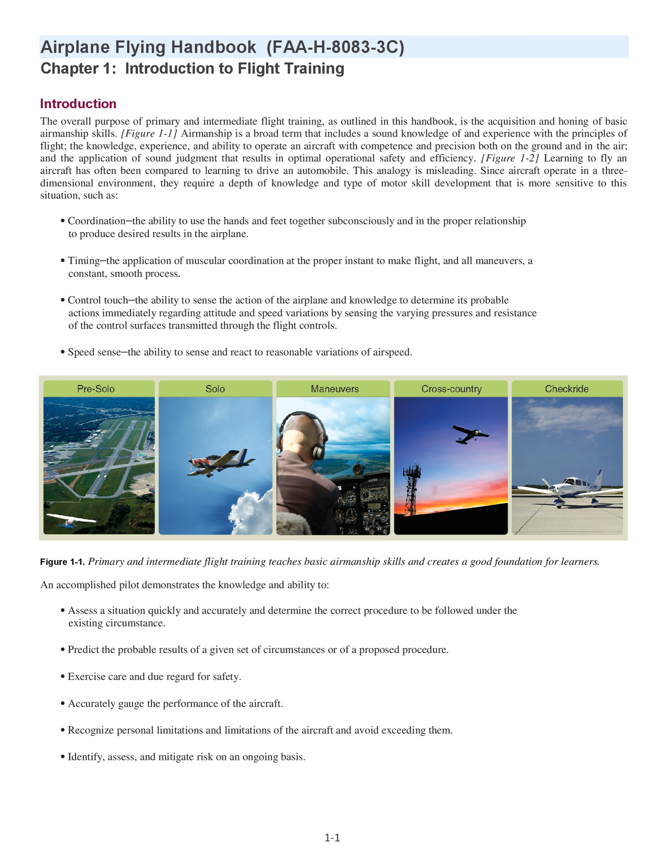An accomplished pilot demonstrates the knowledge and ability to assess a situation quickly and accurately and determine the correct procedure to be followed under the existing circumstance, predict the probable results of a given set of circumstances or of a proposed procedure, exercise care and due regard for safety, accurately gauge the performance of the aircraft, recognize personal limitations and limitations of the aircraft and avoid exceeding them, and identify, assess, and mitigate risk on an ongoing basis.

The development of airmanship skills depends upon effort and dedication on the part of both the learner and the flight instructor, beginning with the very first training flight where proper habit formation begins with the learner being introduced to good operating practices. Every airplane has its own particular flight characteristics.

The purpose of primary and intermediate flight training, however, is not to learn how to fly a particular make and model airplane. The purpose of flight training is to develop the knowledge, experience, skills, and safe habits that establish a foundation and are transferable to any airplane.

The pilot who has acquired necessary skills during training, and develops these skills by flying training-type airplanes with precision and safe flying habits, is able to easily transition to more complex and higher-performance airplanes. Also note that the goal of flight training is a safe and competent pilot. Passing required practical tests for pilot certification is only incidental to this goal.

Role of the FAA. The Federal Aviation Administration (FAA) is empowered by the U.S. Congress to promote aviation safety by prescribing safety standards for civil aviation. Standards are established for the certification of airmen and aircraft, as well as outlining operating rules. This is accomplished through the Code of Federal Regulations (CFR), formerly referred to as Federal Aviation Regulations (FAR).

Title 14 of the CFR, 14 CFR, is titled Aeronautics and Space, with Chapter 1 dedicated to the FAA. Subchapters are broken down by category with numbered parts detailing specific information. For ease of reference, since the parts are numerical, the abbreviated pattern '14 CFR Part __' is used, for example, 14 CFR Part 91.

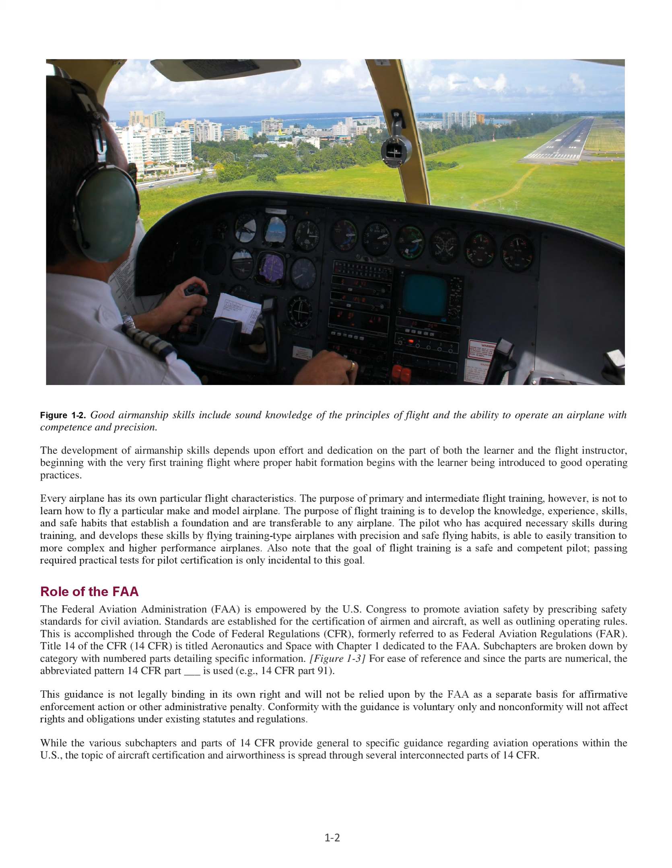While the various subchapters and parts of 14 CFR provide general to specific guidance regarding aviation operations within the U.S., the topic of aircraft certification and airworthiness is spread through several interconnected parts of 14 CFR. 14 CFR Part 21 prescribes procedural requirements for issuing airworthiness certificates and airworthiness approvals for aircraft and aircraft parts.

A standard airworthiness certificate, FAA Form 8100-2, is required to be displayed in the aircraft in accordance with 14 CFR Part 91, Section 91.203(b). It is issued for aircraft type certificated in the normal, utility, acrobatic, commuter, or transport category, and for manned free balloons.

A standard airworthiness certificate remains valid as long as the aircraft meets its approved type design, is in a condition for safe operation and maintenance, and preventative maintenance and alterations are performed in accordance with 14 CFR Parts 21, 43, and 91. 14 CFR Part 39 is the authority for the FAA to issue airworthiness directives, ADs, when an unsafe condition exists in a product, aircraft, or part and the condition is likely to exist or develop in other products of the same type design.

14 CFR Part 43 prescribes rules governing the maintenance, preventive maintenance, rebuilding, and alteration of any aircraft having a U.S. airworthiness certificate. It also applies to the airframe, aircraft engines, propellers, appliances, and component parts of such aircraft.

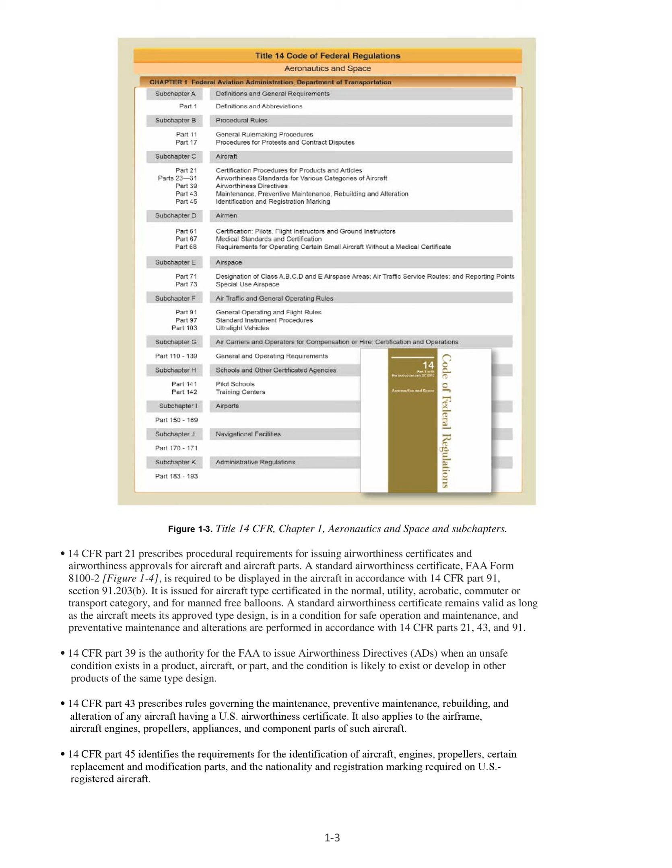14 CFR Part 45 identifies the requirements for the identification of aircraft, engines, propellers, certain replacement and modification parts, and the nationality and registration marking required on U.S. registered aircraft.

14 CFR Part 91 outlines aircraft certifications and equipment requirements for the operation of aircraft in U.S. airspace. It also prescribes rules governing maintenance, preventive maintenance, and alterations. Also found in 14 CFR Part 91 is the requirement to maintain records of maintenance, preventive maintenance, and alterations, as well as records of the 100-hour, annual, progressive, and other required or approved inspections.

While 14 CFR Part 91, Section 91.205 outlines the minimum equipment required for flight, the Airplane Flight Manual/Pilot's Operating Handbook, AFM/POH, lists the equipment required for the airplane to be airworthy. The equipment list found in the AFM/POH is developed during the airplane certification process. This list identifies those items that are required for airworthiness, optional equipment installed in addition to the required equipment, and any supplemental items or appliances.

Figure 1.5 shows an example of some of the required equipment, standard or supplemental, not required but commonly found in the aircraft, and optional equipment for an aircraft.

The equipment list, originally issued by the manufacturer, is maintained by the Type Certificate Data Sheet, TCDS. An aircraft and its installed components and parts must conform to the original type certificate or approved altered conditions to meet the definition of airworthy in accordance with 14 CFR Part 3.5.

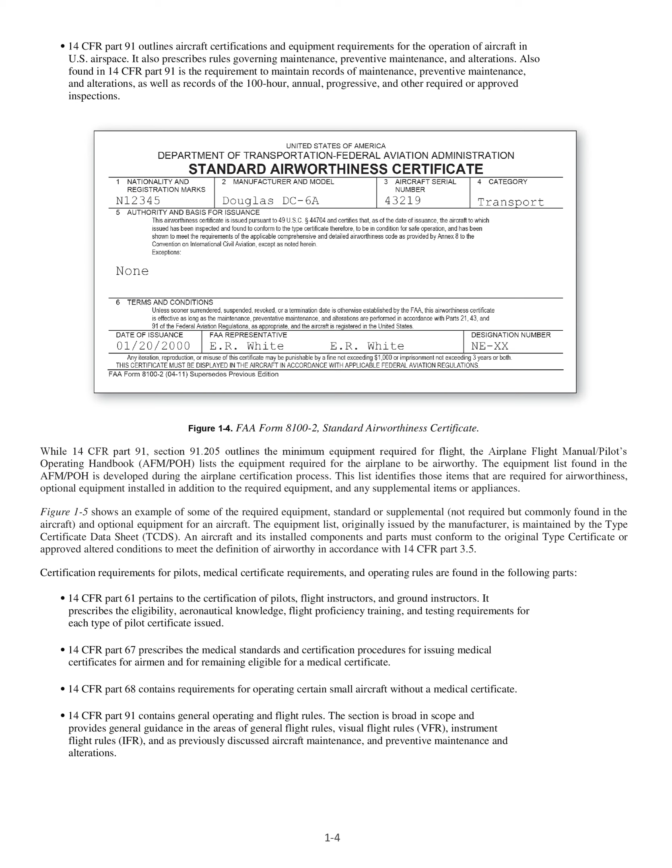14 CFR Part 91 contains general operating and flight rules. The section is broad in scope and provides general guidance in the areas of general flight rules, visual flight rules, VFR, instrument flight rules, IFR, and as previously discussed aircraft maintenance, and preventive maintenance and alterations.

Flight Standard Service. The FAA's Flight Standards Service, FS, sets aviation standards for airmen and aircraft operations in the United States and for American airmen and aircraft around the world. Flight Standards is organized into 4 functional offices: Office of Safety Standards, Air Carrier Safety Assurance, General Aviation Safety Assurance, and Foundational Business.

The primary interface between FS and the general aviation community/general public is the Local Flight Standards District Office, FSDO. The FSDOs are responsible for the certification and surveillance of certain air carriers, air operators, flight schools/training centers, airmen, pilots, flight instructors, mechanics, and other certificate holders. FSDO inspectors also handle general aviation accident investigation at the request of, or in cooperation with, the National Transportation Safety Board.

Each FSDO is staffed by aviation safety inspectors, ASIs, whose specialties include operations, maintenance, and avionics. General aviation ASIs are highly qualified and experienced aviators. Once accepted for the position, an inspector will satisfactorily complete indoctrination training conducted at the FAA Academy. The indoctrination training coursework for a general aviation operations inspector, which is oriented to the tasks to be performed by an ASI in the general aviation environment, includes classroom and flight training on pilot certification activities.

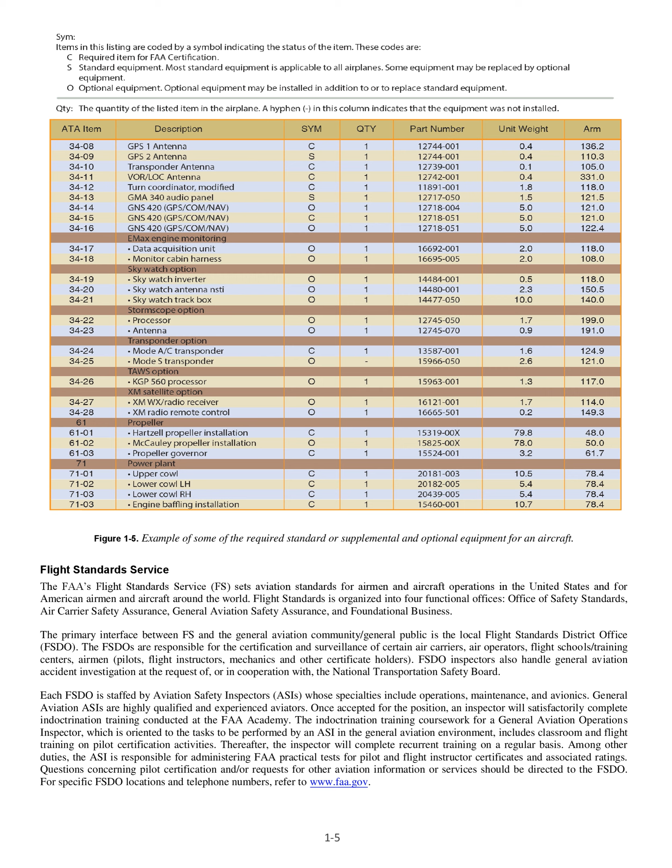Thereafter, the inspector will complete recurrent training on a regular basis. Among other duties, the ASI is responsible for administering FAA practical tests for pilot and flight instructor certificates and associated ratings. Questions concerning pilot certification and/or requests for other aviation information or services should be directed to the FSDO. For specific FSDO locations and telephone numbers, refer to www.faa.gov.

Role of the Pilot Examiner.

Pilot and flight instructor certificates are issued by the FAA upon satisfactory completion of required knowledge and practical tests. The administration of practical tests is an FAA responsibility that may occur at the FSDO level.

However, in order to satisfy the public need for pilot testing and certification services, the FAA delegates certain responsibilities, as the need arises, to private individuals who are not FAA employees.

A designated pilot examiner, DPE, is a private citizen who is designated as a representative of the FAA administrator to perform specific, but limited, pilot certification tasks on behalf of the FAA and may charge a reasonable fee for doing so. Generally, a DPE's authority is limited to accepting applications and conducting practical tests leading to the issuance of specific pilot certificates and/or ratings. A DPE operates under the direct supervision of the FSDO that holds the examiner's designation file.

A FSDO inspector is assigned to monitor the DPE's certification activities. The FAA selects highly qualified individuals to be DPEs. These individuals have good industry reputations for professionalism, high integrity, a demonstrated willingness to serve the public, and adhere to FAA policies and procedures in certification matters.

A DPE is expected to administer practical tests with the same degree of professionalism, using the same methods, procedures, and standards as an FAA ASI. Note that a DPE is not an FAA ASI. A DPE cannot initiate enforcement action, investigate accidents, or perform surveillance activities on behalf of the FAA. However, the majority of FAA practical tests at the recreational, private, and commercial pilot level are administered by DPEs.

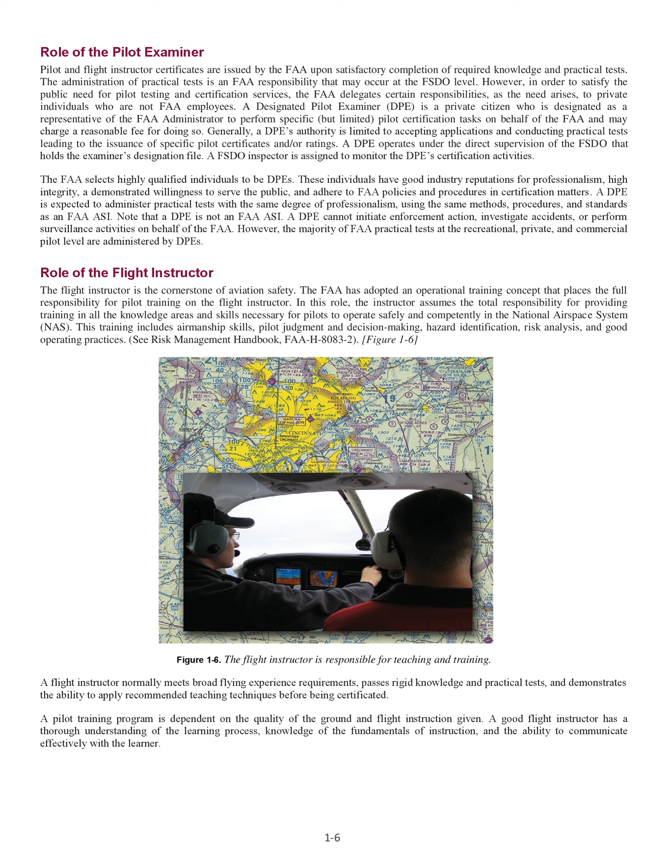A pilot training program is dependent on the quality of the ground and flight instruction given. A good flight instructor has a thorough understanding of the learning process, knowledge of the fundamentals of instruction, and the ability to communicate effectively with the learner. A good flight instructor uses a syllabus and insists on correct techniques and procedures from the beginning of training so that the learner will develop proper habit patterns.

The syllabus should embody the building block method of instruction in which the learner systematically progresses from the known to the unknown. The course of instruction should be laid out so that each new maneuver embodies the principles involved in the performance of those previously undertaken. Consequently, through each new subject introduced, the learner not only learns a new principle or technique, but also broadens their application of those previously learned and has their deficiencies in the previous maneuvers emphasized and made obvious.

The flying habits of the flight instructor, both during flight instruction and as observed by learners when conducting other pilot operations, have a vital effect on safety. Learners consider their flight instructor to be a paragon of flying proficiency whose flying habits they, consciously or unconsciously, attempt to imitate. For this reason, a good flight instructor meticulously observes the safety practices taught to the learners. Additionally, a good flight instructor carefully observes all regulations and recognized safety practices during all flight operations.

A prospective pilot should know that there are other differences among flight instructors. Certain instructors who have performed at a high level have earned a Gold Seal Flight Instructor Certificate. This is not a requirement when looking for an instructor, but it is an indication of an active and successful instructor. Top-notch instructors also participate in the Pilot Proficiency Awards WINGS Program, to improve their proficiency and to serve as an example to learners who also benefit from program participation.

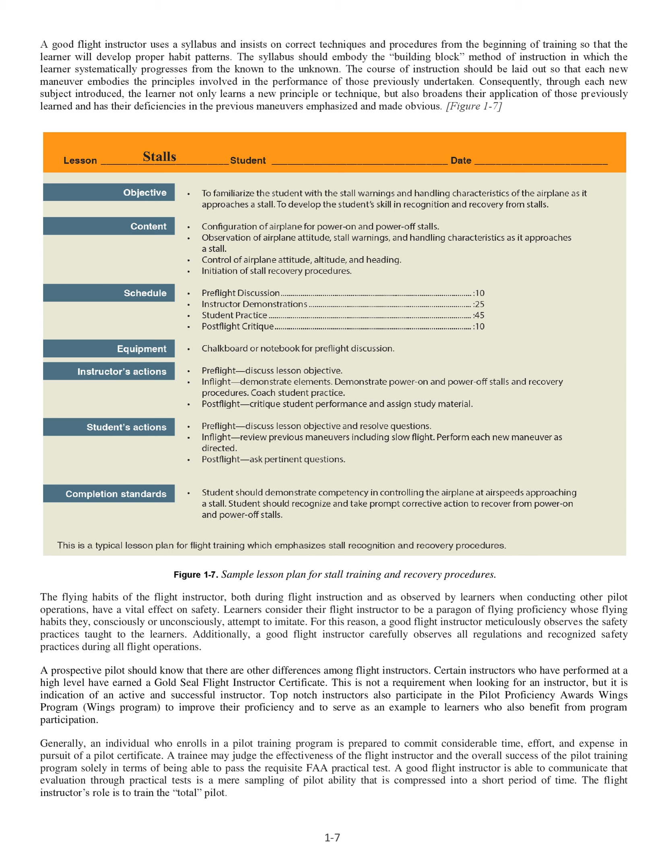A good flight instructor is able to communicate that evaluation through practical tests is a mere sampling of pilot ability, compressed into a short period of time. The flight instructor's role is to train the total pilot.

Sources of flight training. The major sources of flight training in the United States include FAA-approved pilot schools and training centers, non-certificated 14 CFR Part 61 flying schools, and independent flight instructors.

FAA-approved schools are those flight schools certificated by the FAA as pilot schools under 14 CFR Part 141. Application for Part 141 certification is voluntary, and the school needs to meet specific requirements for personnel, equipment, maintenance, and facilities. The school operates each course offering in accordance with an established curriculum that includes a training course outline, TCO, approved by the FAA.

Each TCO contains enrollment prerequisites, a detailed description of each lesson including standards and objectives, expected accomplishments and standards for each stage of training, and a description of the checks and tests used to measure each training course enrollee's accomplishments. An FAA-approved pilot school air agency certificate expires and needs to be renewed every 2 years.

Renewal is contingent upon proof of continued high-quality instruction and a minimum level of instructional activity. Training at an FAA-certificated pilot school is structured, and because of this structured environment, graduates of these pilot schools are allowed to meet the certification experience requirements of 14 CFR Part 61 with less flight time.

Many FAA-certificated pilot schools have DPEs on staff to administer FAA practical tests. Some schools have been granted examining authority by the FAA. A school with examining authority for a particular course has the authority to recommend its graduates for pilot certificates or ratings without further testing by the FAA.

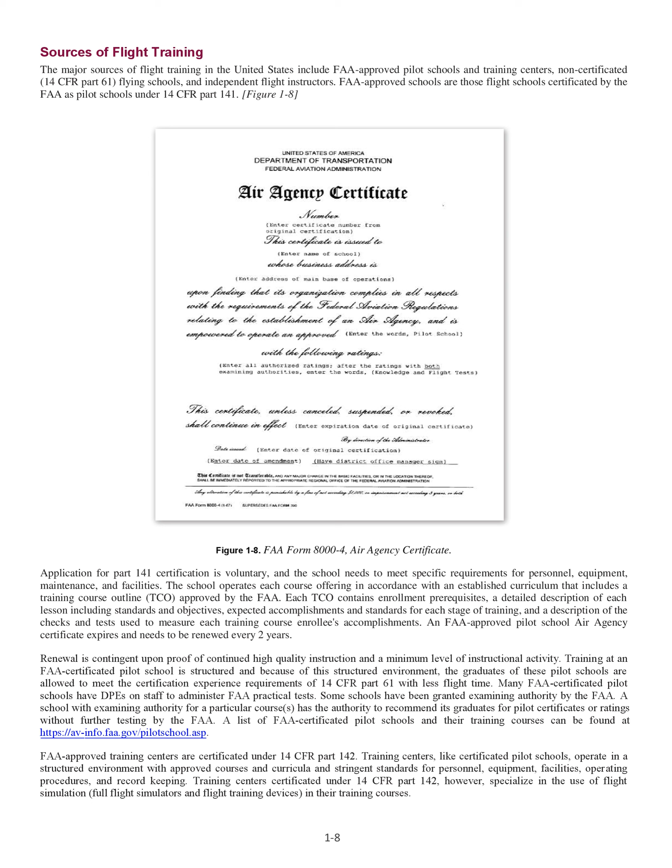Training centers, like certificated pilot schools, operate in a structured environment with approved courses and curricula and stringent standards for personnel, equipment, facilities, operating procedures, and record keeping. Training centers certificated under 14 CFR Part 142, however, specialize in the use of flight simulation, full flight simulators, and flight training devices in their training courses.

There are a number of flying schools in the United States that are not certificated by the FAA. These schools operate under the provisions of 14 CFR Part 61. Many of these non-certificated flying schools offer excellent training and meet or exceed the standards required of FAA-approved pilot schools. Flight instructors employed by non-certificated flying schools, as well as independent flight instructors, meet the same basic 14 CFR Part 61 flight instructor requirements for certification and renewal as those employed by FAA-certificated pilot schools. In the end, any training program is dependent upon the quality of the ground and flight instruction a learner receives.

Airman Certification Standards, ACS, and Practical Test Standards, PTS. Practical tests for FAA pilot certificates and associated ratings are administered by FAA inspectors and DPEs using FAA Airman Certification Standards and Practical Test Standards, which contain structured areas of operation, tasks, and standards.

14 CFR Part 61, Section 61.43 specifies that the practical test consists of the tasks specified in the areas of operation for the airman certificate or rating sought. To pass the test, the applicant demonstrates mastery of the aircraft, performing each task successfully, with proficiency and competency within the approved standards, and sound judgment.

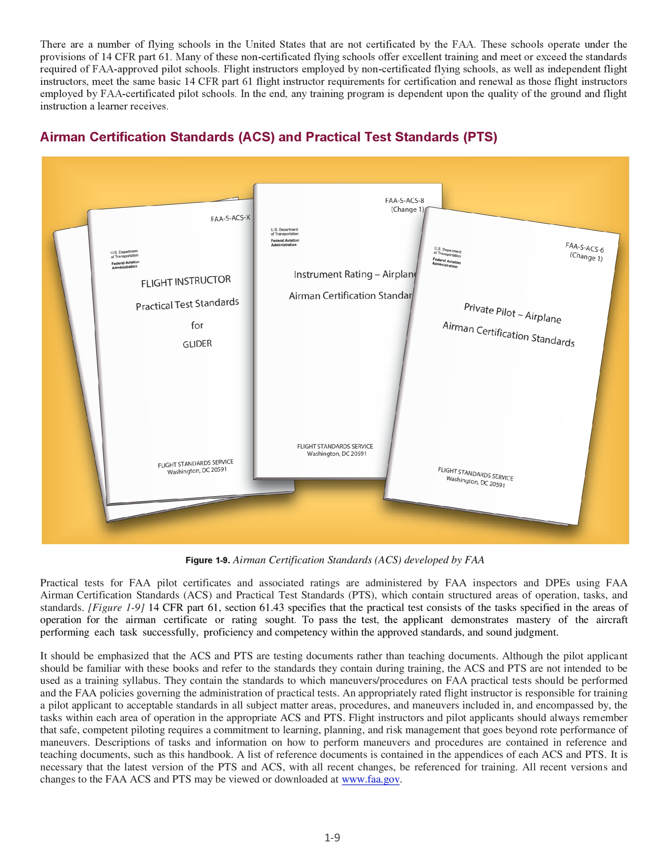Flight instructors and pilot applicants should always remember that safe, competent piloting requires a commitment to learning, planning, and risk management that goes beyond rote performance of maneuvers. Descriptions of tasks and information on how to perform maneuvers and procedures are contained in reference and teaching documents, such as this handbook. A list of reference documents is contained in the appendices of each ACS and PTS.

It is necessary that the latest version of the PTS and ACS, with all recent changes, be referenced for training. All recent versions and changes to the FAA ACS and PTS may be viewed or downloaded at www.faa.gov.

Safety considerations: in the interest of safety and good habit pattern formation, there are certain basic flight safety practices and procedures that should be emphasized by the flight instructor, and adhered to by both instructor and learner, beginning with the very first dual instruction flight. These include, but are not limited to, collision avoidance procedures including proper scanning techniques and clearing procedures, runway incursion avoidance, stall awareness, positive transfer of controls, and flight deck workload management.

Collision avoidance: all pilots should be alert to the potential for mid-air collision and impending loss of separation. The General Operating and Flight Rules in 14 CFR Part 91 set forth the concept of see and avoid. This concept requires that vigilance shall be maintained at all times by each person operating an aircraft, regardless of whether the operation is conducted under IFR or VFR.

Pilots should also keep in mind their responsibility for continuously maintaining a vigilant lookout regardless of the type of aircraft being flown and the purpose of the flight. Most mid-air collision accidents and reported near mid-air collision incidents occur in good VFR weather conditions and during the hours of daylight. Most of these accidents and incidents occur within 5 miles of an airport and/or near navigation aids.

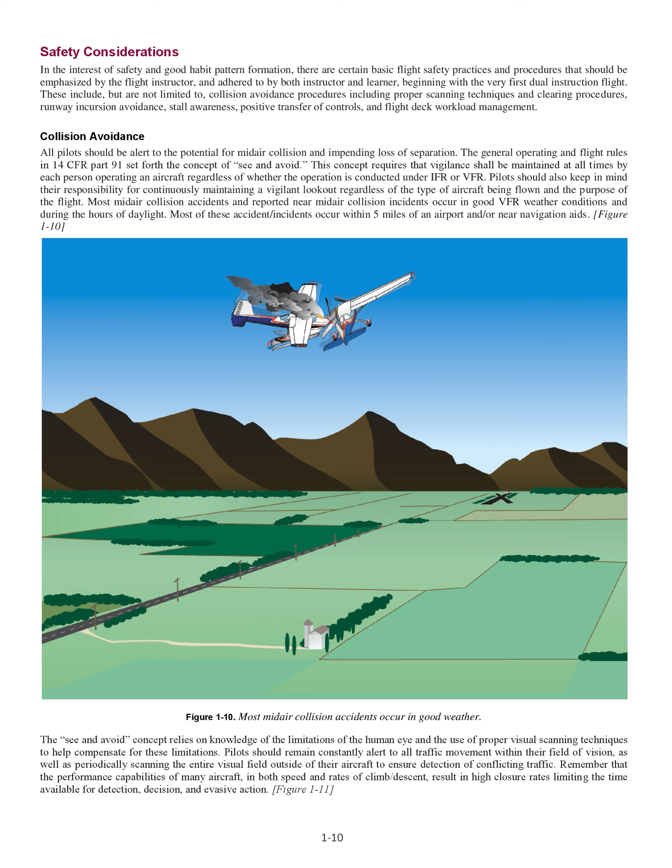Remember that the performance capabilities of many aircraft, in both speed and rates of climb/descent, result in high closure rates limiting the time available for detection, decision, and evasive action. The probability of spotting a potential collision threat increases with the time spent looking outside, but certain techniques may be used to increase the effectiveness of the scan time.

The human eyes tend to focus somewhere, even in a featureless sky. In order to be most effective, the pilot should shift glances and refocus at intervals. Most pilots do this in the process of scanning the instrument panel, but it is also important to focus outside to set up the visual system for effective target acquisition.

Pilots should also realize that their eyes may require several seconds to refocus when switching views between items on the instrument panel and distant objects. Proper scanning requires the constant sharing of attention with other piloting tasks, and is thus easily degraded by psychological and physiological conditions such as fatigue, boredom, illness, anxiety, or preoccupation.

Effective scanning is accomplished with a series of short, regularly spaced eye movements that bring successive areas of the sky into the central visual field. Each movement should not exceed 10 degrees, and each area should be observed for at least 1 second to enable detection. Although horizontal back and forth eye movements seem preferred by most pilots, each pilot should develop a scanning pattern that is comfortable and adhere to it to assure optimum scanning.

Peripheral vision can be most useful in spotting collision threats from other aircraft. Each time a scan is stopped and the eyes are refocused, peripheral vision takes on more importance because it is through this element that movement is detected. Apparent movement is usually the first perception of a collision threat, and probably the most important, because it is the discovery of a threat that triggers the events leading to proper evasive action.

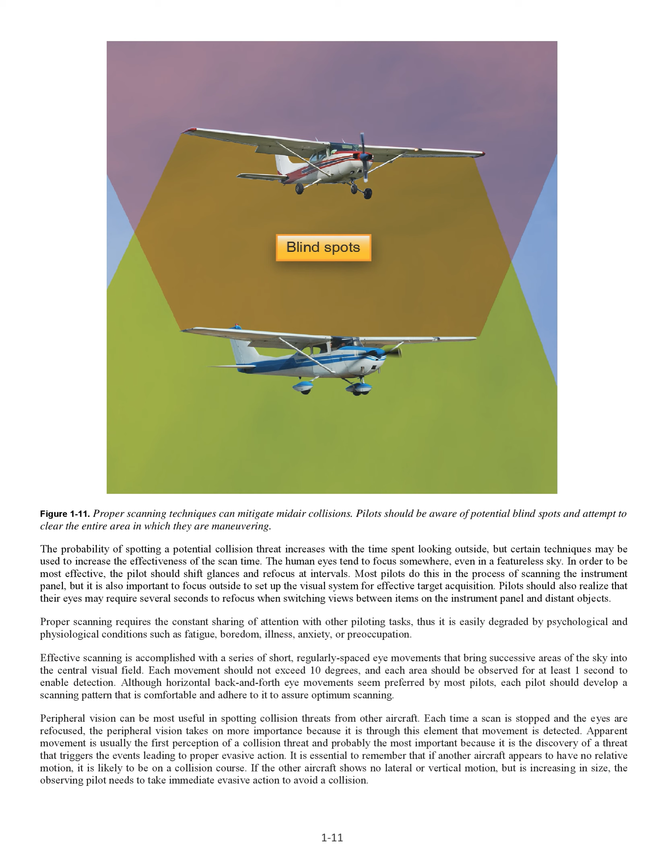It is essential to remember that if another aircraft appears to have no relative motion, it is likely to be on a collision course. If the other aircraft shows no lateral or vertical motion, but is increasing in size, the observing pilot needs to take immediate evasive action to avoid a collision.

The importance of, and the proper techniques for, visual scanning should be taught at the very beginning of flight training. The competent flight instructor should be familiar with the visual scanning and collision avoidance information contained in AC 90-48, Pilot's Role in Collision Avoidance, and the Aeronautical Information Manual, AIM.

There are many different types of clearing procedures. Most are centered around the use of clearing turns.

The essential idea of the clearing turn is to be certain that the next maneuver is not going to proceed into another aircraft's flight path. Some pilot training programs have hard and fast rules, such as requiring two 90-degree turns in opposite directions before executing any training maneuver. Other types of clearing procedures may be developed by individual flight instructors.

Whatever the preferred method, the flight instructor should teach the beginning learner an effective clearing procedure and insist on its use. The learner should execute the appropriate clearing procedure before all turns and before executing any training maneuver. Proper clearing procedures, combined with proper visual scanning techniques, are the most effective strategy for collision avoidance.

In case of pilot incapacitation, an installed emergency autoland (EAL) system may take control of an airplane, navigate to an airport, and land without additional human intervention. Currently, these systems take no evasive action in response to potential impact with another aircraft, although they transmit over the radio. Pilots should avoid the path of any aircraft under the control of an EAL or suspected as under the control of an EAL system. The Emergency Procedures chapter in this handbook contains additional information about these systems.

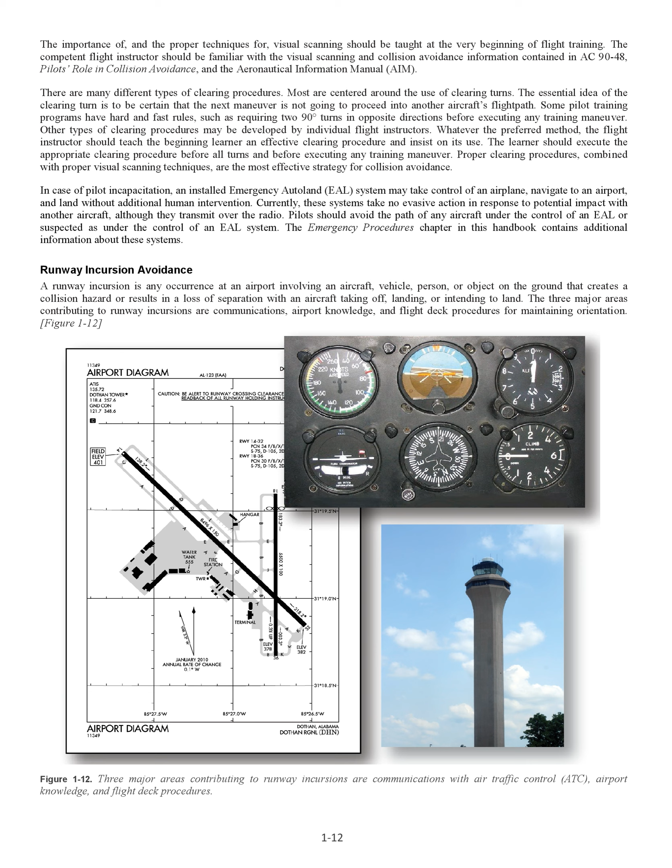Runway incursion avoidance. A runway incursion is any occurrence at an airport involving an aircraft, vehicle, person, or object on the ground that creates a collision hazard or results in a loss of separation with an aircraft taking off, landing, or intending to land. The three major areas contributing to runway incursions are communications, airport knowledge, and flight deck procedures for maintaining orientation.

Taxi operations require constant vigilance by the entire flight crew, not just the pilot taxiing the airplane. During flight training, the instructor should emphasize the importance of vigilance during taxi operations. Both the learner and the flight instructor need to be continually aware of the movement and location of other aircraft and ground vehicles on the airport movement area.

Many flight training activities are conducted at non-tower controlled airports. The absence of an operating airport control tower creates a need for increased vigilance on the part of pilots operating at those airports. Planning, clear communications, and enhanced situational awareness during airport surface operations reduces the potential for surface incidents.

Safe aircraft operations can be accomplished and incidents eliminated if the pilot is properly trained early on and throughout their flying career on standard taxi operating procedures and practices. This requires the development of the formalized teaching of safe operating practices during taxi operations. The flight instructor is the key to this teaching.

The flight instructor should instill in the learner an awareness of the potential for runway incursion, and should emphasize runway incursion avoidance procedures. For more information and a list of additional references, refer to Chapter 14 of the Pilot's Handbook of Aeronautical Knowledge. Stall Awareness.

14 CFR Part 61, Section 61.87, D10 and E10, require that a student pilot who is receiving training for a single-engine or multi-engine airplane rating or privileges, respectively, log flight training in stalls and stall recoveries prior to solo flight.

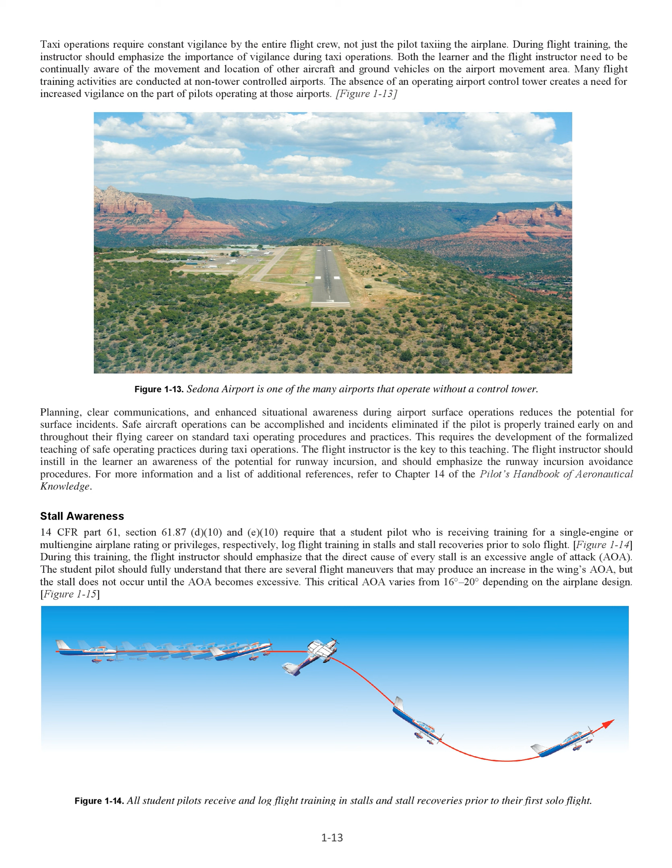During this training, the flight instructor should emphasize that the direct cause of every stall is an excessive angle of attack, AOA. The student pilot should fully understand that there are several flight maneuvers that may produce an increase in the wing's AOA, but the stall does not occur until the AOA becomes excessive. This critical AOA varies from 16 to 20 degrees depending on the airplane design.

The flight instructor should emphasize that low speed is not necessary to produce a stall. The wing can be brought to an excessive AOA at any speed. High pitch attitude is not an absolute indication of proximity to a stall. Some airplanes are capable of vertical flight with a corresponding low AOA. Most airplanes are quite capable of stalling at a level or near level pitch attitude.

The key to stall awareness is the pilot's ability to visualize the wing's AOA in any particular circumstance, and thereby be able to estimate his or her margin of safety above stall. This is a learned skill that should be acquired early in flight training and carried through the pilot's entire flying career. The pilot should understand and appreciate factors such as airspeed, pitch attitude, load factor, relative wind, power setting, and aircraft configuration in order to develop a reasonably accurate mental picture of the wing's AOA at any particular time.

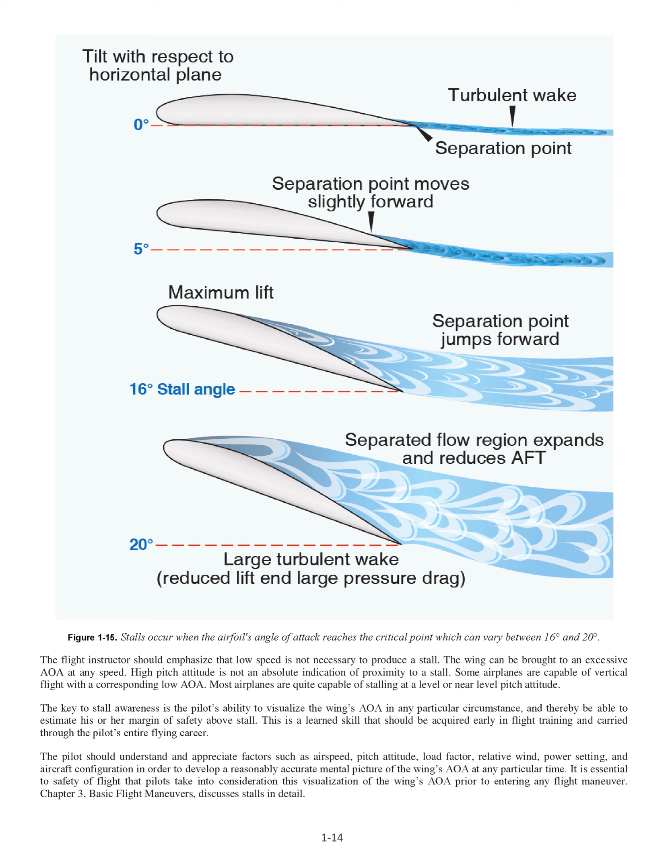It is essential to safety of flight that pilots take into consideration this visualization of the wing's angle of attack prior to entering any flight maneuver. Chapter 3, Basic Flight Maneuvers, discusses stalls in detail.

Use of checklists. Checklists have been the foundation of pilot standardization and flight deck safety for years. The checklist is a memory aid and helps to ensure that critical items necessary for the safe operation of aircraft are not overlooked or forgotten.

Checklists need not be do-lists. In other words, the proper actions can be accomplished, and then the checklist used to quickly ensure all necessary tasks or actions have been completed, with emphasis on the 'check' in checklist.

However, checklists are of no value if the pilot is not committed to using them. Without discipline and dedication to using the appropriate checklists at the appropriate times, the odds are on the side of error. Pilots who fail to take the use of checklists seriously become complacent and begin to rely solely on memory.

The importance of consistent use of checklists cannot be overstated in pilot training. A major objective in primary flight training is to establish habit patterns that will serve pilots well throughout their entire flying career. The flight instructor should promote a positive attitude toward checklist usage, and the learner should realize its importance.

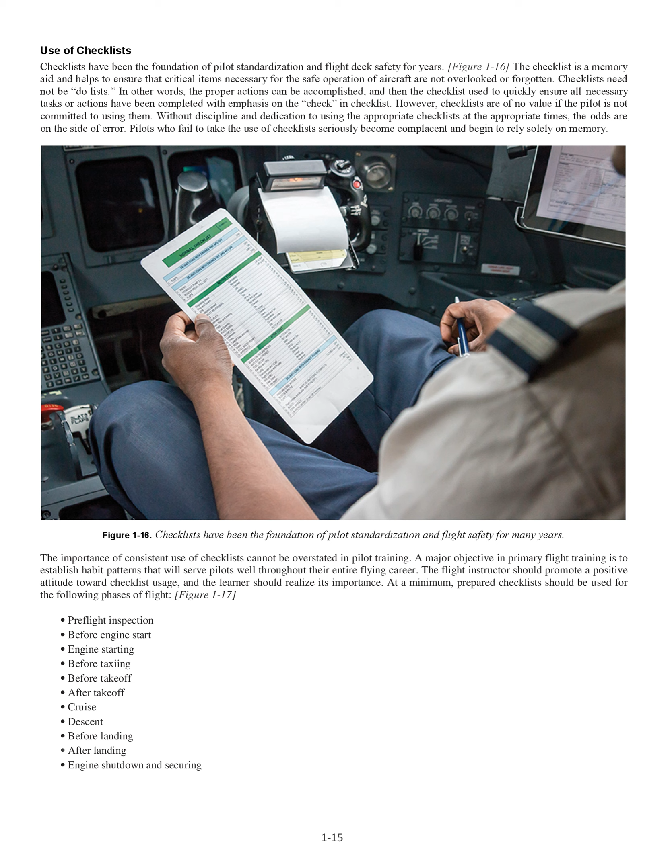At a minimum, prepared checklists should be used for the following phases of flight: pre-flight inspection, before engine start, engine starting, before taxiing, before takeoff, after takeoff, cruise, descent, before landing, after landing, engine shutdown and securing.

During flight training, there should be a clear understanding between the learner and flight instructor of who has control of the aircraft. Prior to any flight, a briefing should be conducted that includes the procedures for the exchange of flight controls. The following three-step process for the exchange of flight controls is highly recommended.

When a flight instructor wishes the learner to take control of the aircraft, he or she should say to the learner, 'You have the flight controls.' The learner should acknowledge immediately by saying, 'I have the flight controls.' The flight instructor should then confirm by again saying, 'You have the flight controls.' Part of the procedure should be a visual check to ensure that the other person actually has the flight controls.

When returning the controls to the flight instructor, the learner should follow the same procedure the instructor used when giving control to the learner. The learner should stay on the controls until the instructor says, 'I have the flight controls.' There should never be any doubt as to who is flying the airplane at any time.

Numerous accidents have occurred due to a lack of communication or misunderstanding as to who actually had control of the aircraft, particularly between learners and flight instructors. Establishing the above procedure during initial training ensures the formation of a very beneficial habit pattern.

Continuing education. In many activities, the ability to receive feedback and continue learning contributes to safety and success. For example, professional athletes receive constant coaching. They practice various techniques to achieve their best. Medical professionals read journals, train, and master techniques to achieve better outcomes.

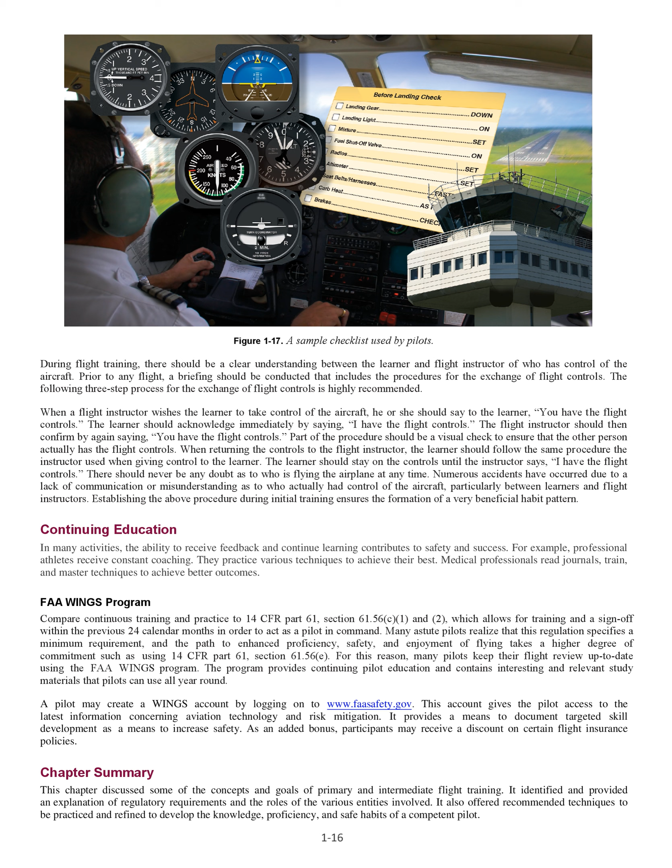Chapter Summary. This chapter discussed some of the concepts and goals of primary and intermediate flight training. It identified and provided an explanation of regulatory requirements and the roles of the various entities involved. It also offered recommended techniques to be practiced and refined to develop the knowledge, proficiency, and safe habits of a competent pilot.